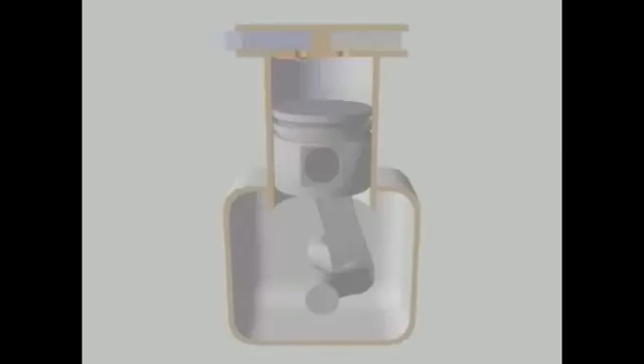A reciprocating compressor compresses refrigerant vapor in a cylinder using a piston. In a way, reciprocating compressors are like automobile engines. The pistons are directly driven through a wrist pin and connecting rod from a crankshaft.

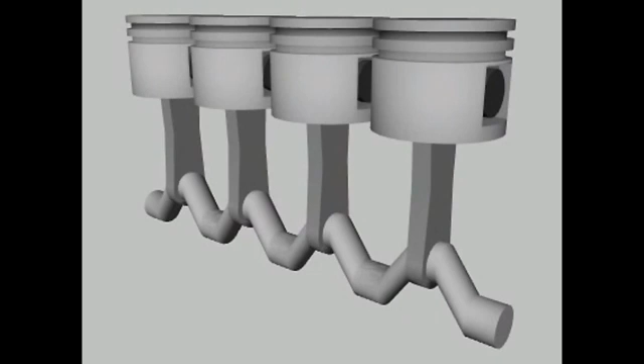Depending on their size, reciprocating compressors may have one or more cylinders. Multiple cylinders may be arranged in line, opposed, or in a V.

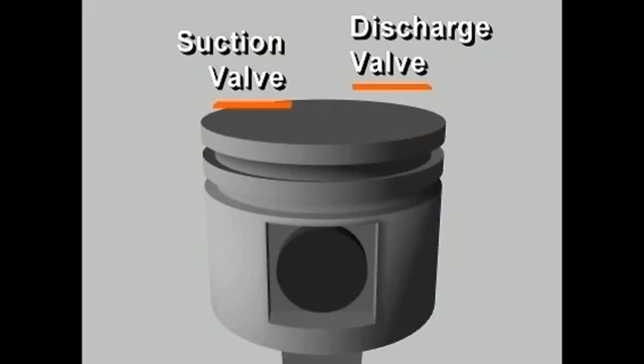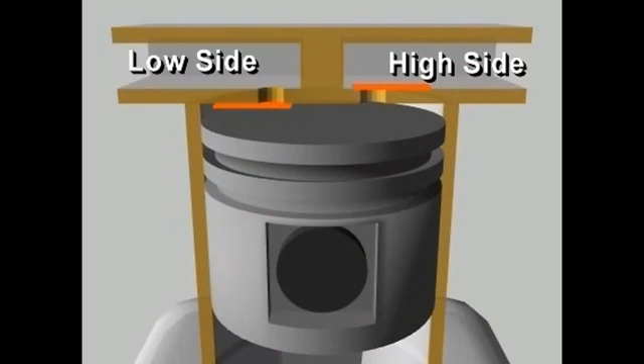In each cylinder, reciprocating compressors have both a suction valve and a discharge valve. These valves give the compressor its ability to pump refrigerant vapor against a pressure difference. They are usually located in the head of the cylinder, in passages connected to the high or low pressure side of the system.

Let's follow the compression process in a single-cylinder reciprocating compressor during one complete revolution of the crankshaft. Starting with the piston at the top of its stroke, or at top dead center, the piston begins to move downward as the crankshaft rotates. Because both valves are closed, the downward moving piston reduces the pressure in the cylinder.

As the pressure in the cylinder falls below the low side pressure in the suction line, the pressure difference opens the suction valve, letting refrigerant vapor flow into the cylinder. The piston continues down and pulls in more vapor until the cylinder is filled with low-pressure vapor at the bottom of its stroke. Once past bottom dead center, the piston begins its upward stroke.

The suction valve closes. As the piston moves up, it reduces the volume of the space in the cylinder, increasing the pressure of the vapor.

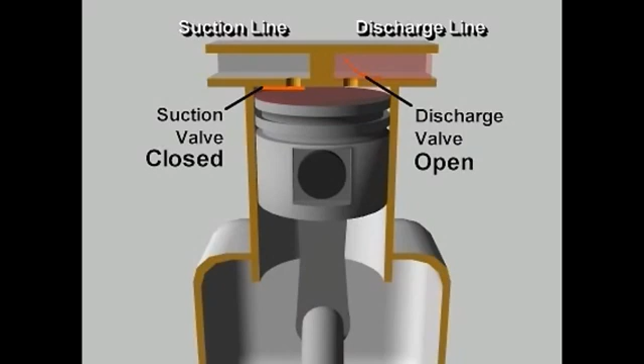When the pressure in the cylinder exceeds the high side pressure in the discharge line, the pressure difference pushes the discharge valve open, letting the compressed vapor flow out of the cylinder. This continues until the piston reaches the top of its stroke and most of the compressed vapor has been expelled into the discharge line. When the piston begins its downward stroke, the discharge valve closes.

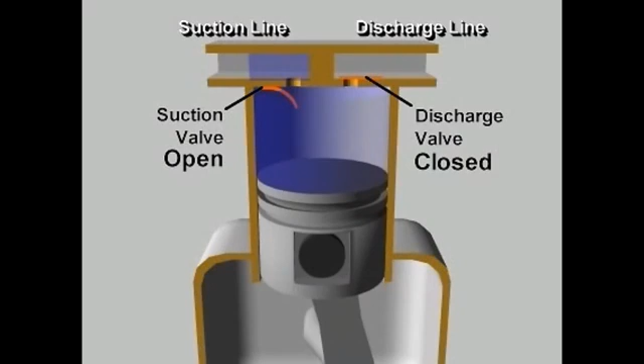The complete cycle then repeats during each revolution of the crankshaft. This is the mechanical positive displacement vapor compression cycle.